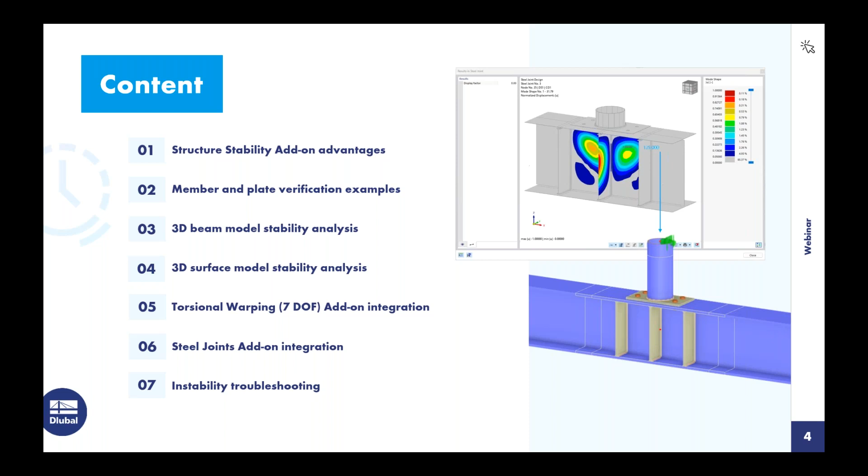So to begin, when looking at the structure stability, this is an optional add-on within the RFEM 6 program. This allows us to run an eigenvalue analysis to determine the critical load factors and eigenvectors, or in other words,

the buckling modes of our structure. Therefore, we can evaluate the stability of the structural system in regions prone to buckling.

So when we're talking about regions prone to buckling, we're typically referring to very slender beams or columns or thin-walled shell or plate elements.

Now, everything that we'll be carrying out today will be according to a linear eigenvalue analysis, which we'll talk a little bit more about in the next slide, but keep in mind that a nonlinear stability analysis is also available where we can actually increase the load increments to see the failure of the structure.

As already mentioned too, not only can we look at the buckling modes of the structure, but we can carry out instability troubleshooting to locate modeling errors with a load-independent eigenvalue analysis.

Now, of course, through all of these examples we'll see the graphical rendering of the stability modes, as we see over here on the right-hand side.

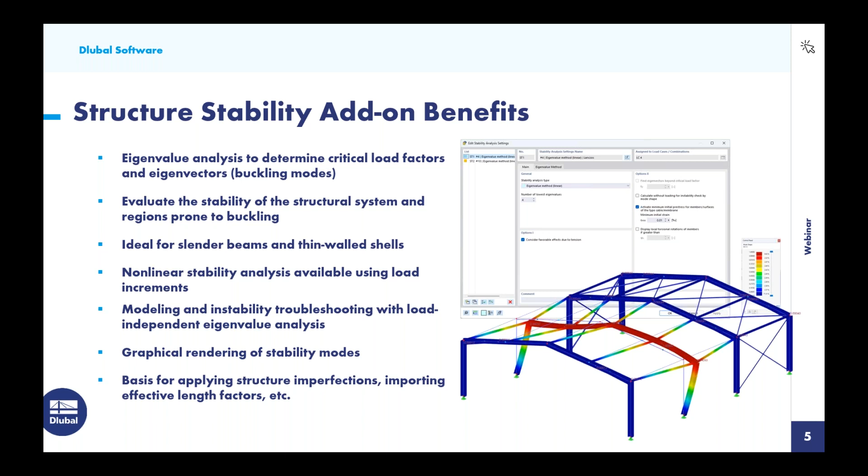Then we can integrate for further capabilities within the static analysis, such as applying structure imperfections. We can import effective length factors, and we'll see those carried out in the further design examples.

Now, when we do activate this add-on, we have 3 analysis types available to us. The first is the eigenvalue method, or a linear analysis.

And this is essentially where the buckling modes are determined through a linear method. If we have any nonlinearities defined, either material or geometric nonlinearities within the model, these are internally converted to linear elements in order to carry out the stability analysis with constant stiffnesses.

Now, alternatively, we do have the incremental method with an eigenvalue analysis. So this is nonlinear and will take into consideration all geometric and material nonlinearities.

Essentially, we will carry out the failure criteria and nonlinear effects, and these will be included during the incremental loading increase. We will find the last stable state with this nonlinear analysis to carry out the linear stability analysis, or the eigenvalues.

The third option here is the incremental method without the eigenvalue analysis, also nonlinear. This is identical to option number 2 with that nonlinear analysis capability, except we simply won't carry out the eigenvalue analysis within that last stable state.

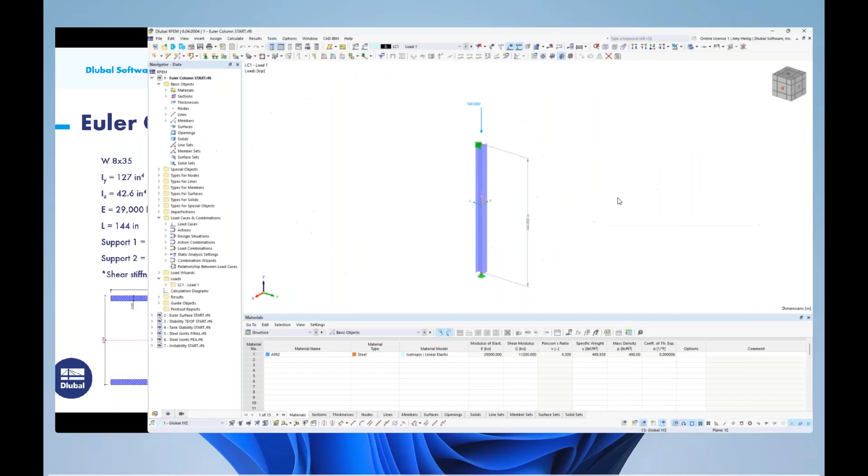Looking at this example within RFEM 6, our main base program, we see the W section profile with the 100 kip load applied at the top, the pin roller scenario, 12 feet high. We want to activate the structure stability add-on, which we can do in the toolbar by accessing base data, or by right-clicking the model name. Under the second tab are all of our available and optional add-ons, and for today we'll be utilizing the structure stability add-on.

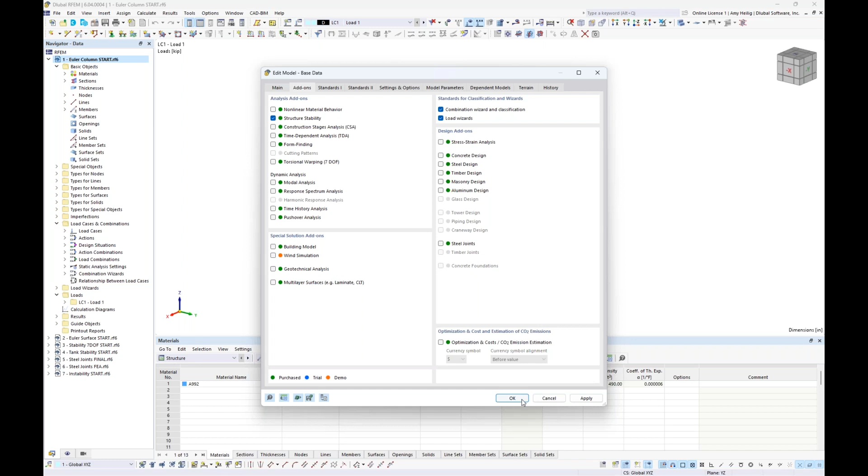When I click OK, pretty much nothing changes within the model itself, but we can go into the load cases and combinations dialog box. I currently have only one load case defined with that 100 kip load applied at the top of the column, and this will be carried out according to a first order static analysis.

We can activate the structure stability add-on with this checkbox at the bottom. Looking at the default definition types, there are two immediately set. The first is an eigenvalue method linear analysis, which we recognize from the PowerPoint, and we'll carry out that linear analysis today. We can set the number of eigenvalues to solve for; the default is 4, but we could increase or decrease this depending on our model. The second default setting is identical, just with a higher number of eigenvalues set to 10 by default. So, carrying out the linear analysis with 4 eigenvalues, we'll click OK.

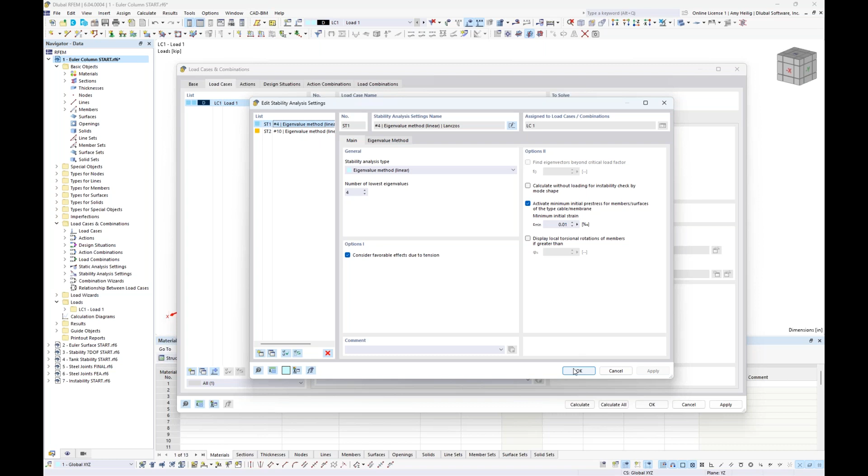To run this calculation, we initially calculate the static analysis with this first load case, but then we carry out the second calculation for the stability analysis. We're not so interested in the static analysis results, but immediately we jump to the stability analysis results now available to us in our navigator.

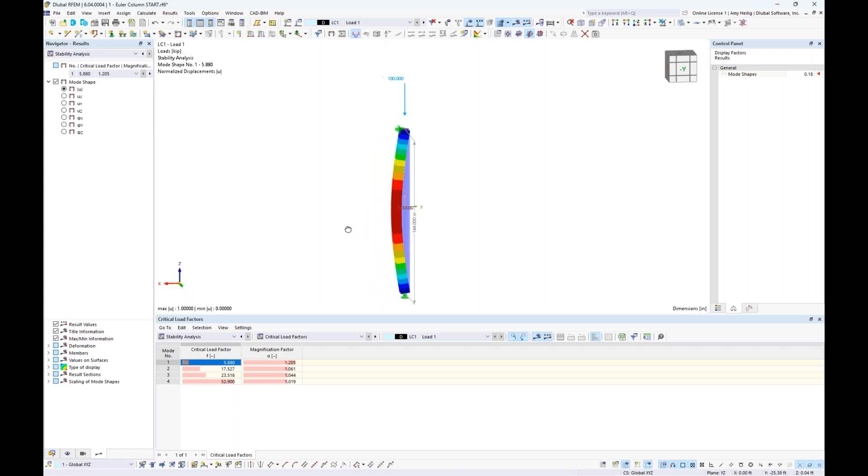Looking at the results for the structure stability add-on, we see 4 different eigenvalues we've solved for, and within the table we also see the critical load factor given. The critical load factor for this first buckling mode shape, which buckles out of plane in the weak axis direction, is the factor we multiply the applied loads by—in our case 100 kips—before the structure fails, as shown in this first buckling mode shape. The second mode shape buckles in the strong axis direction, and as expected we see a higher critical load factor of 17.527, which we again multiply by the 100 kip applied load to determine the critical buckling load.

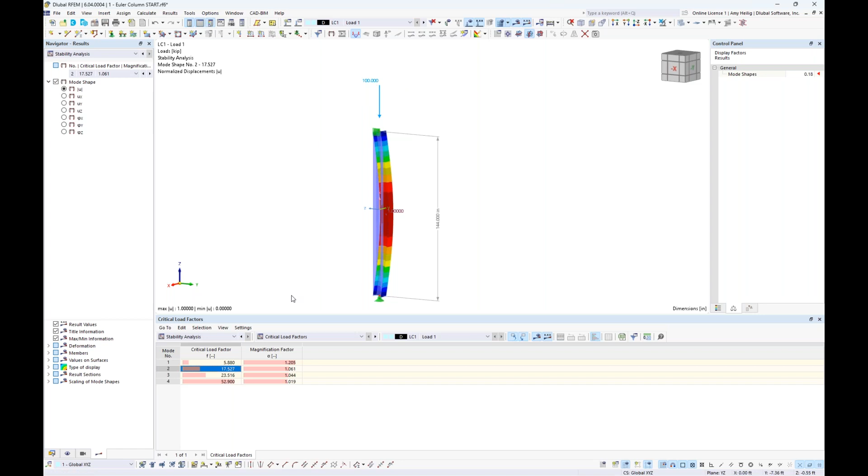So I think it's important to understand how we're carrying out this structural stability analysis for simple flexural design here, for the stability modes. Moving on to our second example, this is really very similar to what we just saw with our column, yet this time I wanted to utilize a 2D surface element.

So we go into RFEM here to open up this example. As mentioned, this is a two-dimensional surface, so we have 10 inches wide, 50 inches tall. I have left on the display here the FE mesh, so you can see how the structure will mesh this for this two-dimensional object. We also have a 1 kip per inch load applied at the top here.

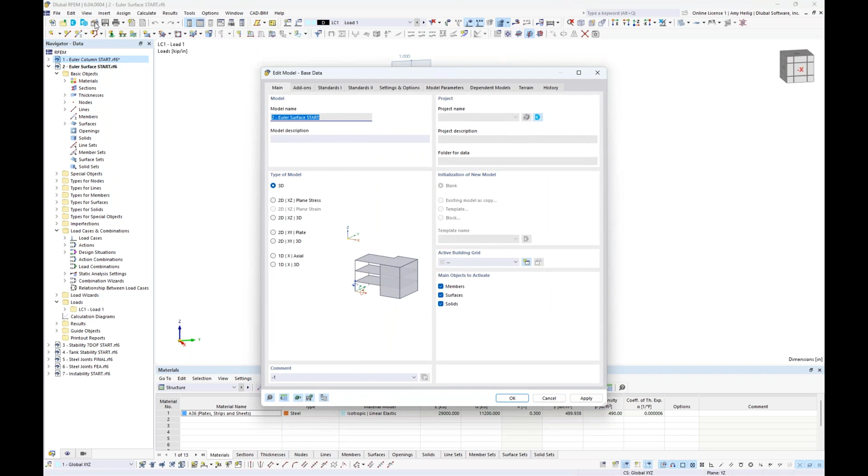So very similar to the column, we want to go into the base data, and we can do so within the toolbar directly to activate, under this second tab, once again, the structure stability add-on. We go into our load cases and combinations, and for this example we have our single load case here with the 1 kip per inch applied as a line load at the top of this 2D surface element.

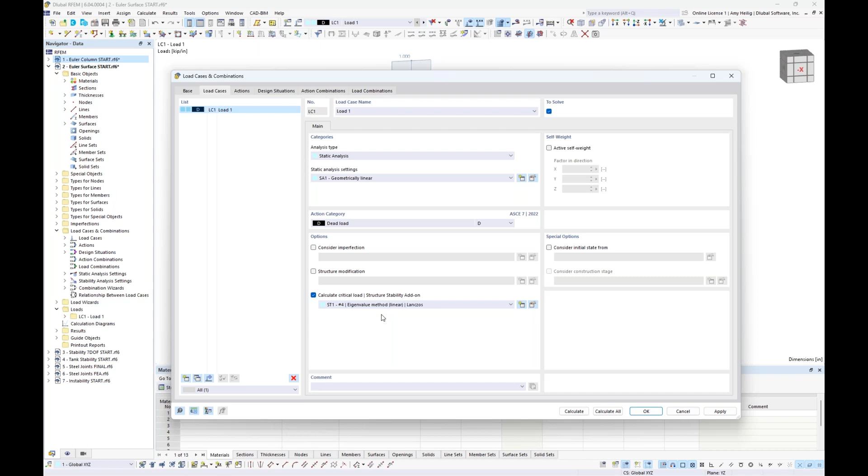We want to not only carry out the static analysis but also the structure stability analysis. We'll go ahead and leave these default settings here for a linear analysis, carrying out 4 eigenvalues, and we can run this calculation. The program would initially mesh the structure if we didn't already have it, carry out the static analysis, and then move on to the stability analysis.

Taking a look at our stability analysis results here within our dropdown, we see our 4 different mode shapes. The first mode shape you can see here is buckling out of plane for this 2D surface element, with a critical load factor of 9.566. Taking a look at these additional mode shapes, we can see the deflected shape, but the critical load factor here is much higher. In reality, we're most concerned with the lowest critical load factor.

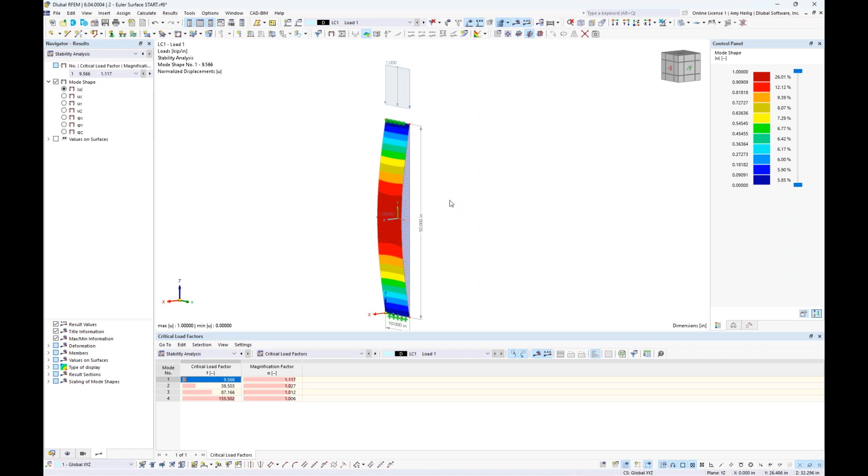Again, this is the factor, 9.566, that we can multiply by the applied load here of 1 kip per inch before we would expect to see structure failure, or the buckling out of plane. We take this information back to the PowerPoint to compare to the analytical formula, and we find a ratio of 0.997.

Okay, so that should give us a better understanding then of the basic behavior of this structure stability add-on for a simple beam and a simple surface.

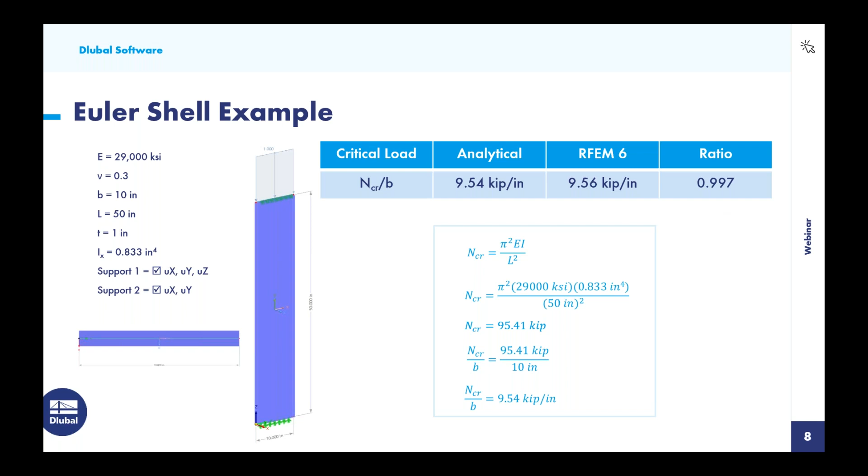Now let us go back into RFEM here to open up our third example. This one should be a little bit more interesting, where we have a 3D structure that is composed entirely of beam elements. So you can see that all of these are member elements for our columns, beams, and braces, represented by a single line element here. So no surfaces for this particular example.

If we want to do a quick overview, the cross sections are from the AISC database. So we have W10 by 49s. We have some square HSS sections spanning between these moment frames, single angles for our cross braces here for lateral bracing, and we also have a very small taper for this beam member, in particular at 25% of the member length before it frames into the vertical columns.

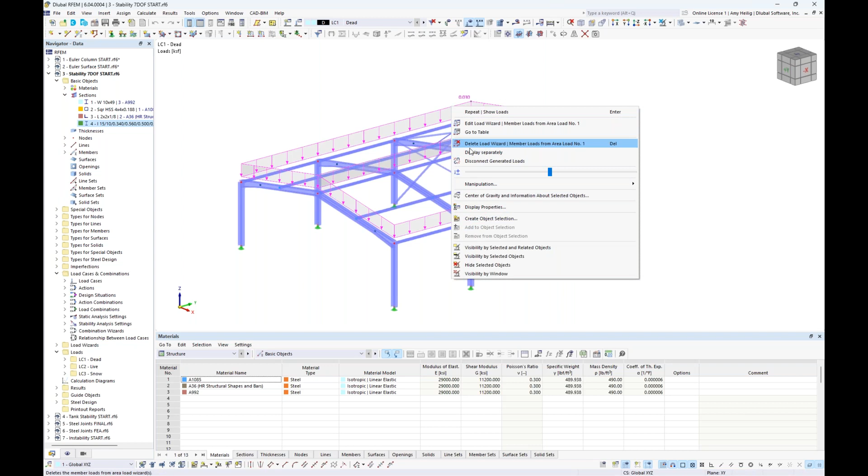Now to quickly take a look at the loading for this example, I have only 3 load cases defined. We can view these loads here, and these are just general area loads created with the load wizard for dead load. If we're curious to see how the load distribution looks, we can right-click to display separately, and notice that I have created a one-way area load distribution so that the loads are mainly on these main beams here rather than the HSS spanning in the global Y direction.

We can also view here the live load, same concept. If we want to view the area load instead, we can see this shown here on the structure with a varied magnitude.

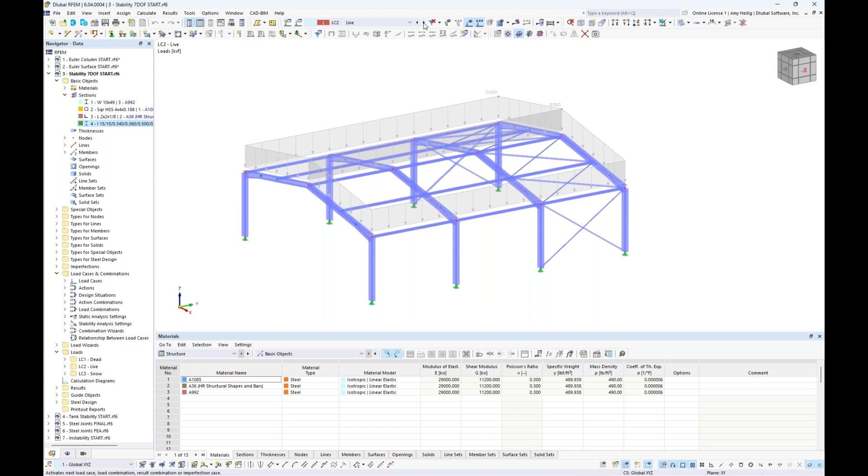And finally, we have a projected snow load in the vertical direction. For this example, I have applied only gravity loads. When evaluating the buckling behavior of our structure, we want to evaluate the worst case scenario with the highest compression forces in our members. In column elements, we want to see the highest forces acting downward, typically from gravity loads. If we included wind uplift forces, this would only help the buckling behavior further, since it introduces additional tension in those members. So when evaluating structure stability, we want to look at those downward compression, gravity-only load cases. I've combined these load cases into load combinations according to ASCE7.

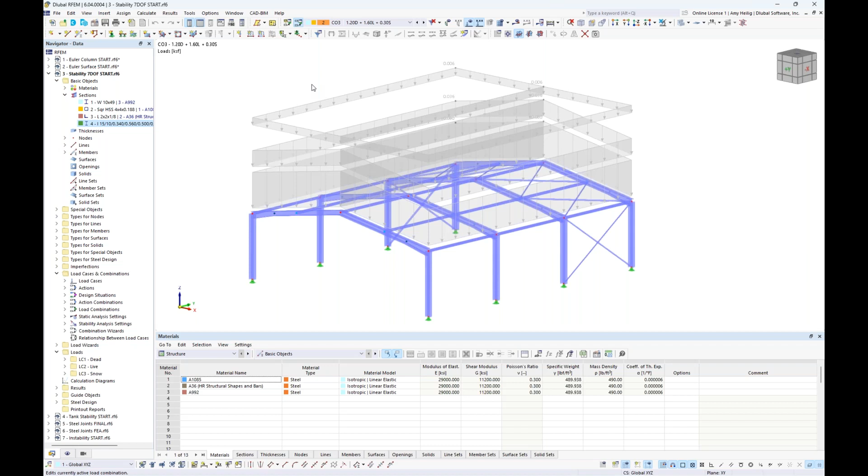We can see those load combinations displayed here graphically along with the relevant load factors. I'm going to go into my load cases and combinations. We could activate structure stability for each individual load case, as in our previous simple examples. But instead, I'm interested in carrying out the buckling analysis for my load combinations, where all the load cases are combined together.

The program by default creates two design situations based on ASCE7 2022 in this example. You can think of a design situation as simply grouping together all of our factored load combinations. We see this here: LRFD according to ASCE7, as well as our second design situation, which groups together all of our unfactored load combinations. This will eventually give us an envelope solution for those factored and unfactored load combinations together.

Under the combination wizard settings, everything is solved here for our load combinations according to a second order analysis, but we have the ability to activate the stability analysis directly within the design situation. These default settings are identical to what we saw previously within the load cases, where we can carry out the linear analysis, and perhaps increase this to 10 different eigenvalues to solve for this structure.

Now that I have activated it within the design situation itself, I take a look at the load combinations individually listed out, and I can see by default that the structure stability add-on is activated here, simply because I activated that checkbox under the design situation. We can also come in and individually carry out the structure stability for each load combination as well.

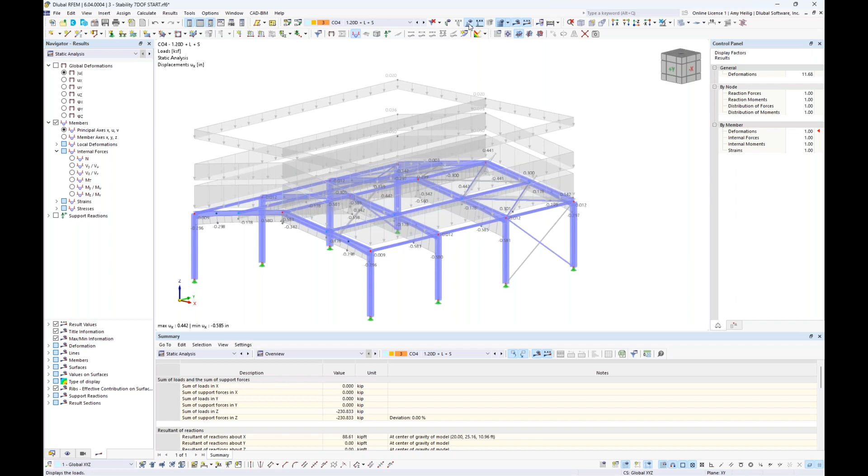When we toggle this dropdown to the design situation for our factored load combinations, this is nice because it's more or less an envelope solution for the static analysis. Within this table showing our static analysis results for this design situation, we also have the stability analysis envelope solution. The minimum critical load factor is 10.532, and the controlling load combination is load combination number 3.

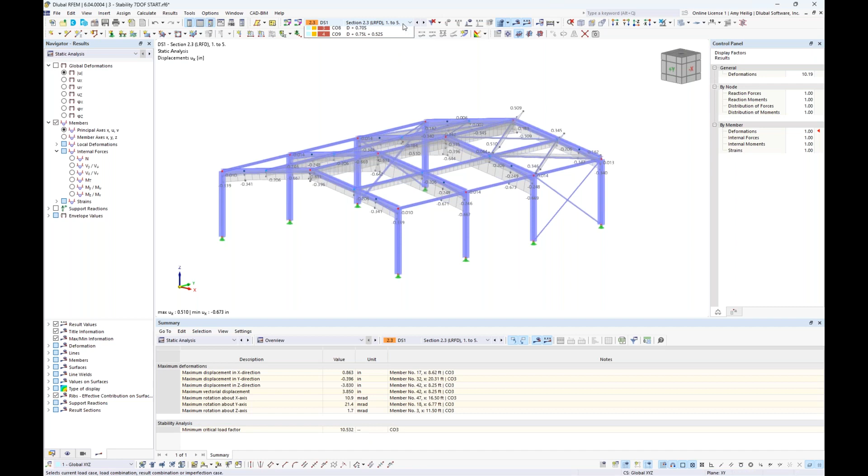It's nice that we don't need to run each individual stability analysis for each load combination and manually check the results, since the program gives us the controlling load combination here. We toggle down to display the loads for load combination number 3, and no surprise, this is the controlling case because we have all 3 loads activated with the highest load factors, giving us the greatest compression forces in our members.

We will toggle down to the stability analysis results for load combination number 3. As we had input into the program, we solved for 10 different mode shapes. Starting with mode shape number 1, we see a racking of this initial moment frame with a critical load factor of 10.532, as shown within the design situation itself. Essentially, we're seeing flexural buckling in the strong axis direction of these columns.

Looking at some of the additional mode shapes, we can see similar behavior just in different locations of the structure, with a higher critical load factor. As we continue to increase, we may start to see more localized mode shapes, meaning the individual buckling of these columns, particularly in the weak axis direction. Whereas compared to the mode shape before, that was more of a global mode shape that affects the structure together.

Okay, so now that we are looking at mode shape number 1, let us focus in on this particular column here, and this is member number 10. When we are looking at the stability analysis results within the table, we can use this drop down to view the results by member.

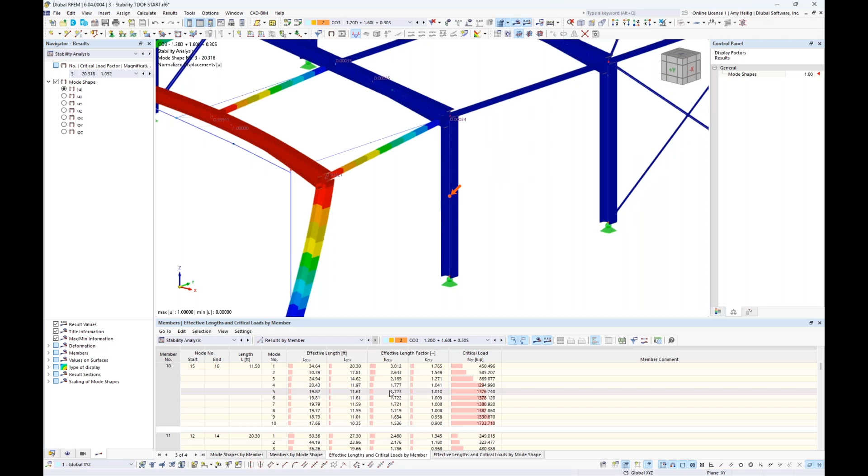Now, when I take a look at these additional mode shapes, they're really not affecting member number 10 until I get down to mode shape number 7. And here we see the failure in the weak axis direction for member number 10. We see the relevant effective length factor in the weak axis direction given as 1.008 and the effective length as 11.59.

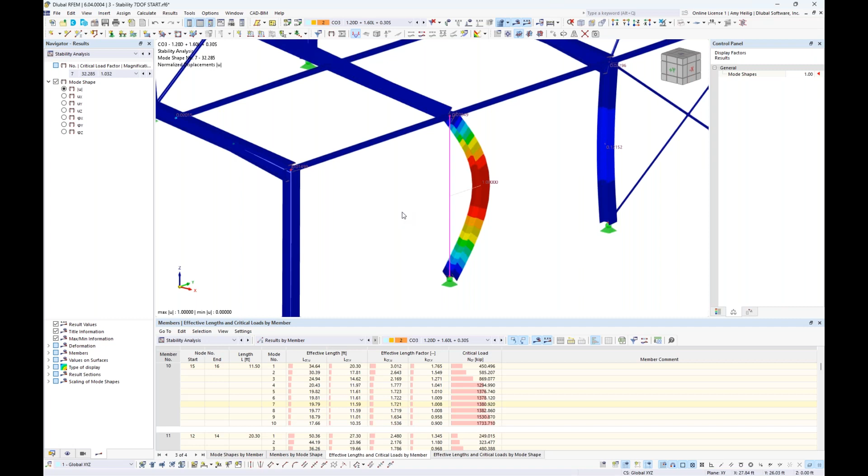So assuming that we have already activated the steel design add-on within RFEM to carry out the steel design according to the AISC, information such as the unbraced lengths or effective lengths are always needed in order to carry out that design. And we do so by inputting in the effective length for the member directly.

I want to show you a nice feature here that, assuming again that we're carrying out design according to the AISC with that steel design add-on, we input our first effective length definition where you have the ability to import in from the stability analysis.

So when I turn on this checkbox, I get a new tab here where for the strong axis direction, for consideration of, if we go back here to the main tab, flexural buckling about the major axes, we can import in that effective length factor directly from the stability analysis.

So we choose here a load combination number 3. We will choose the mode shape number 1, and we can either graphically select member number 10 or we can choose it here within our dropdown, and notice that that effective length factor is automatically brought in as 3.01.

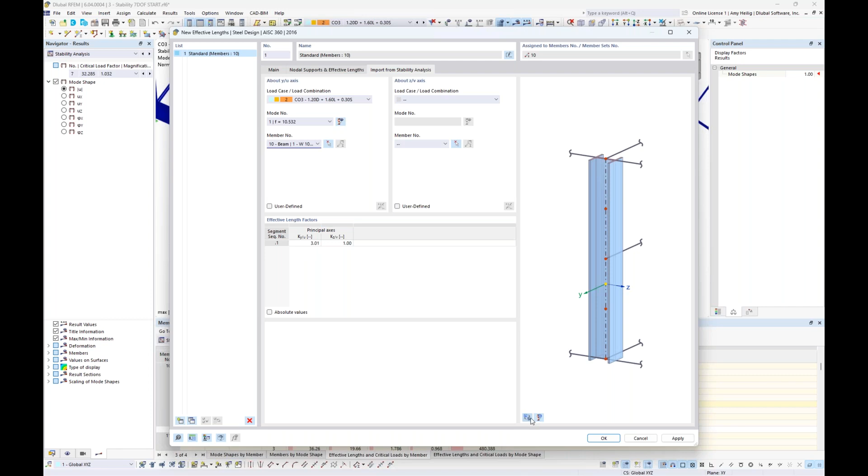We can do the exact same thing for the weak axis direction. Again, this is specific for member number 10. We will choose load combination number 3, but this time we want to choose mode number 7. Remember, that was where we saw this column fail in the weak axis buckling direction, again for member number 10.

And we see that effective length factor brought in automatically as 1.01. So we don't need to do anything further here in terms of the effective length definition for flexural buckling in the strong and weak axis direction if we integrate this with the structure stability add-on.

Okay, so now that we have covered the basic stability mode shapes here, keep in mind that everything that we have seen so far has been based on 6 degrees of freedom. And with 6 degrees of freedom in these various mode shapes, we notice that we're really only able to consider flexural buckling.

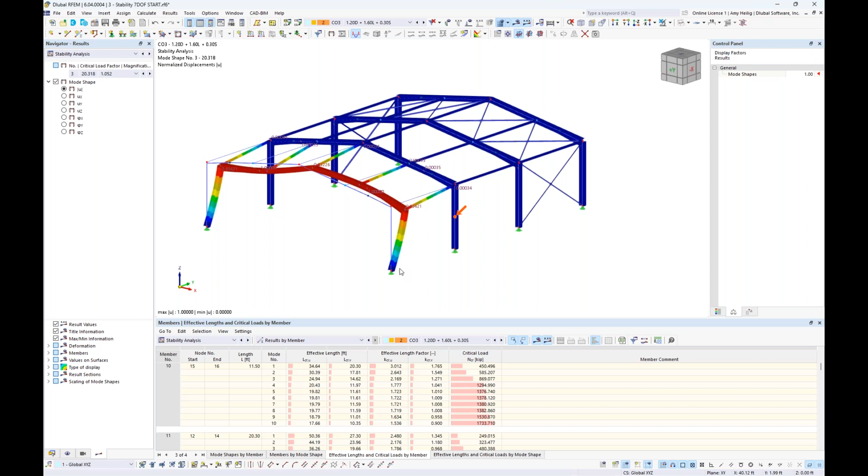We certainly can see this with the mode shapes directly with flexural buckling failure of the columns themselves. But if we back up a step to look at the static analysis results or the internal forces from load combination number 3, what we'll actually see here is that we have pretty high bending forces along the length of our members. And when we look at our columns, we have pretty high axial forces, of course. And when we're talking about these bending forces, for example, for these beams, this should immediately flag us that possibly lateral torsional buckling is an additional stability failure state that we need to consider.

So let us go back to the PowerPoint here to discuss these different stability failure modes. Now, we should be very familiar with the flexural buckling by now for our members. Ultimately, there's some critical buckling load for the strong axis and the weak axis before we see this member fail with flexural buckling.

But there are also additional failure modes such as torsional buckling that has some other critical buckling load factor before we would see this member twist about its longitudinal axes. This might be quite common for something like a cruciform section.

Then we also have flexural torsional buckling. When we have an applied axial force to the member on something like a single angle that's unsymmetric, we're not only going to see this flexural buckling, but it's also going to be twisting about its axes.

And of course, lateral torsional buckling is also a consideration when we have a bending moment along the length. So something like singly symmetric sections or unsymmetric sections, we're not only going to see it move out of plane, but also twist about its own axes. And the problem is that 6 degrees of freedom can only consider flexural buckling.

Now, we can go ahead and say, well, if we are designing according to AISC or CSA, of course the codes have analytical equations that are going to design for these additional stability failure modes. But this is in the design process. What I'm talking about specifically is with the static analysis as well as the structural stability.

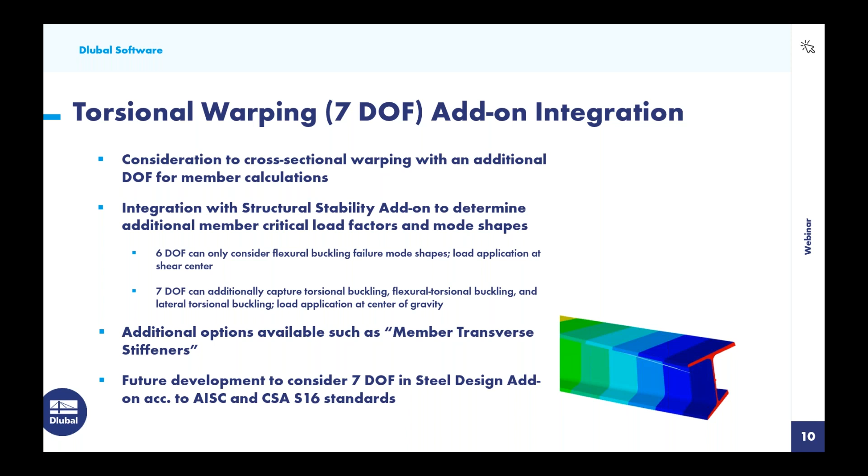Okay, so what we will do here is go back to the RFEM model, and we want to go into the base data here. Under the second tab, we will activate now not only the structural stability, but the torsional warping 7 degrees of freedom. When I do this, the program says it needs to delete the results, of course, because that was all based on 6 degrees of freedom.

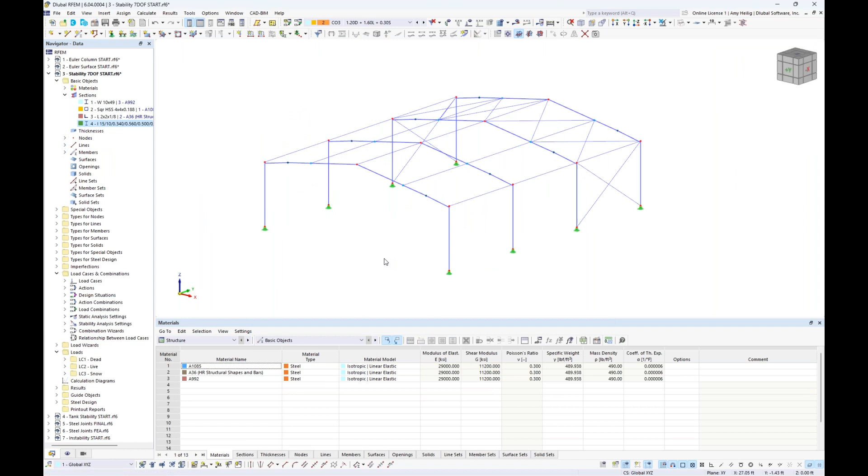Now, by default, all of our members are considered free to warp. There is no warping restraint along the member length. In addition, if you would like the warping internal forces to be transferred to adjacent members, it's important here to create what we call a member set.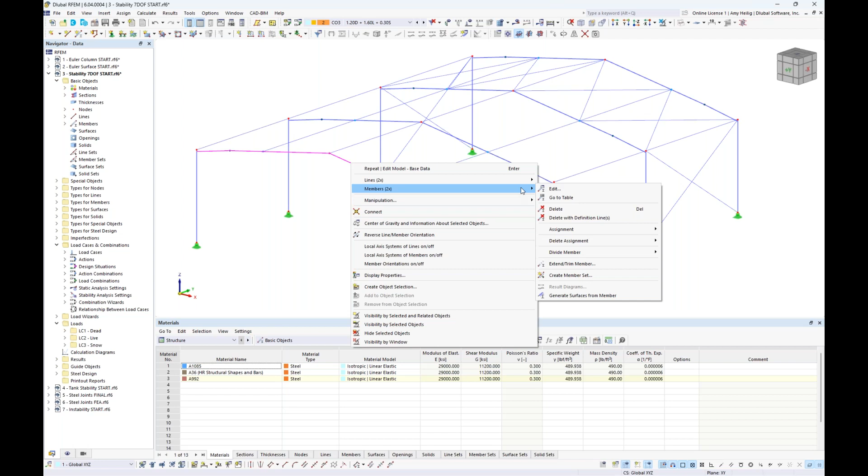So what I mean by this is that if we want the warping forces with the 7th degree of freedom to be transferred from, let's say, our beam on the right over to our beam on the left, we would need to hold down our control key to make sure both are highlighted here. We right click, and under the member option, we have the ability to create a member set.

So that's just simply grouping those members together so that those warping internal forces will be carried out to adjacent members. Now, circling back to the warping restraints, we should see now under types for members, we have a few additional options here, including member transverse stiffeners. So I'd like to double click on this to create a few stiffener types for these members in order to restrain the warping at the member start and at the member end. And within this dropdown, we actually have several different stiffener types.

For example, we can choose a flat plate where we could input the material and the dimensions, and the program will automatically calculate the warping spring to be considered within the analysis.

For today, we will use this option at the bottom called warping restraint, where we use the full warping restraint and apply this to the member based on a certain percentage of the length. So I'm going to activate this warping restraint at 0% of the member length, or the member start.

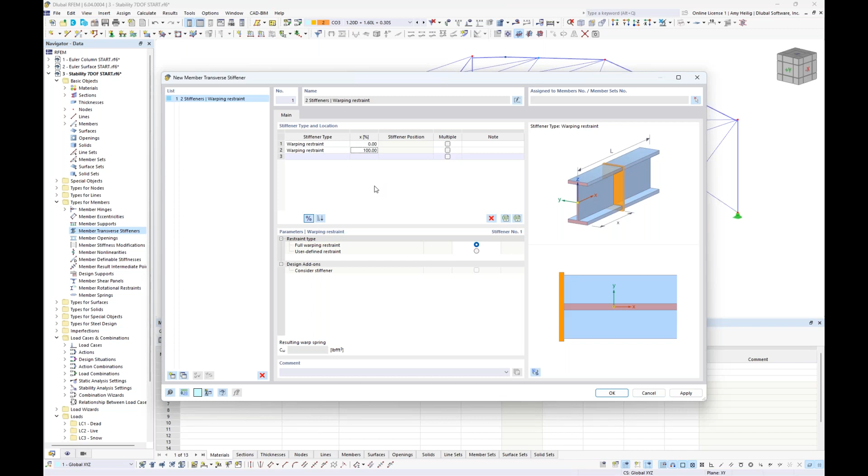And I'm going to add in a second warping restraint at the member end, so 100% of the member length. Then we can graphically select which members we would like to apply this warping restraint to. I'll use my selection box to select all of those main beams, click OK, and you'll notice we get a nice symbol representing where that warping restraint is located at the member start and end.

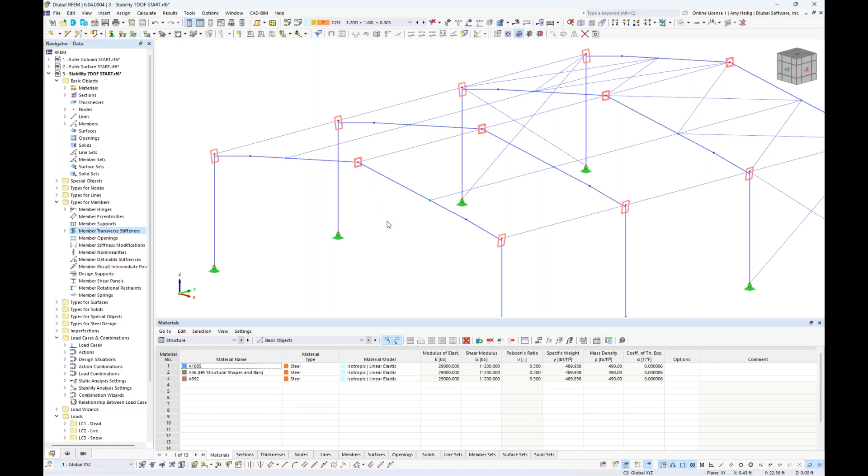So now we want to go to calculate all, and we have to rerun the static analysis with 7 degrees of freedom. We see the load cases carried out, but also the load combinations according to a second order analysis. Then we run through the structure stability again for all load combinations, and we should see slightly different results.

Taking a look at the static analysis results, where we can view the internal forces of our members, you'll notice we have a few additional options now with that 7th degree of freedom. For example, we can view the warping moment along the member length, or the primary torsional moment and the secondary torsional moment. This previously was not available with 6 degrees of freedom.

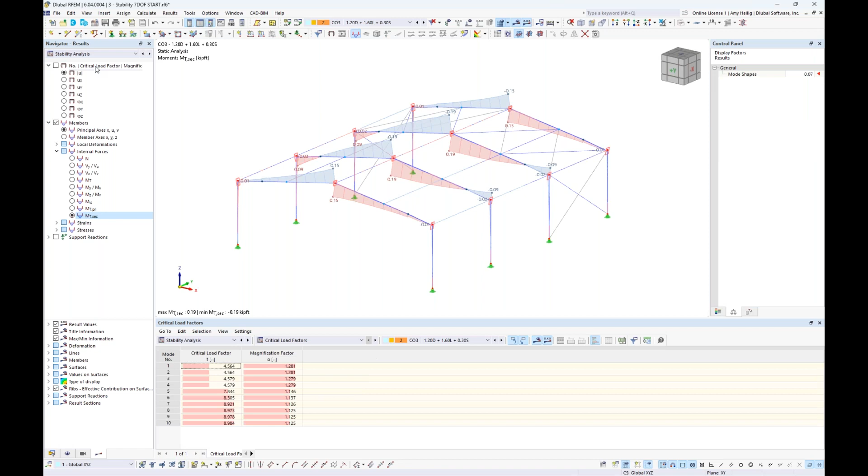Toggling down to our stability analysis, we should see pretty significant or different results here as well. No longer do our 10 different mode shapes look like what we previously saw with 6 degrees of freedom. We see here the critical load factor is now 4.564, and our relevant mode shape is really focused on these columns.

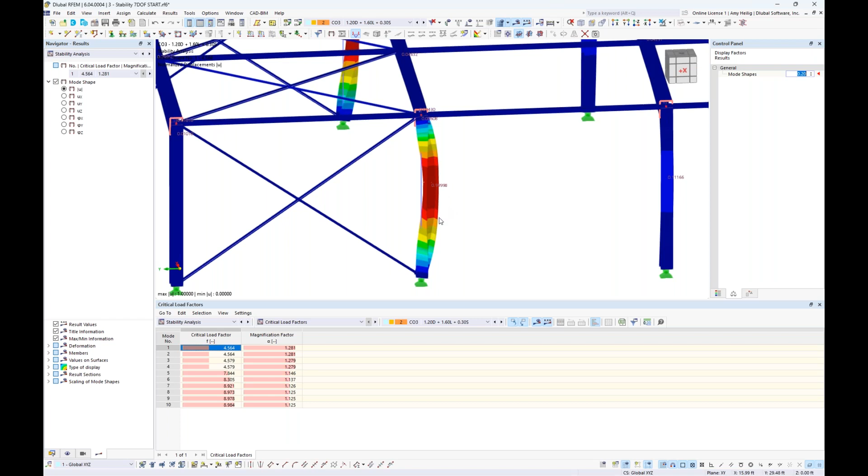We can increase the size of this mode shape ever so slightly to see how this column essentially has flexural torsional buckling, where it is both bending out of plane but also twisting about its own axis. So you can see the critical load factor has significantly decreased.

Previously it was around 10.5, and now it's only 4.564. Let's look at the relevant mode shapes. When we look at these first four mode shapes, it's really flexural torsional buckling of these columns, but then we get into mode shape 5 with a critical load factor of 7.84, and this is where we begin to see lateral torsional buckling of those beam elements themselves.

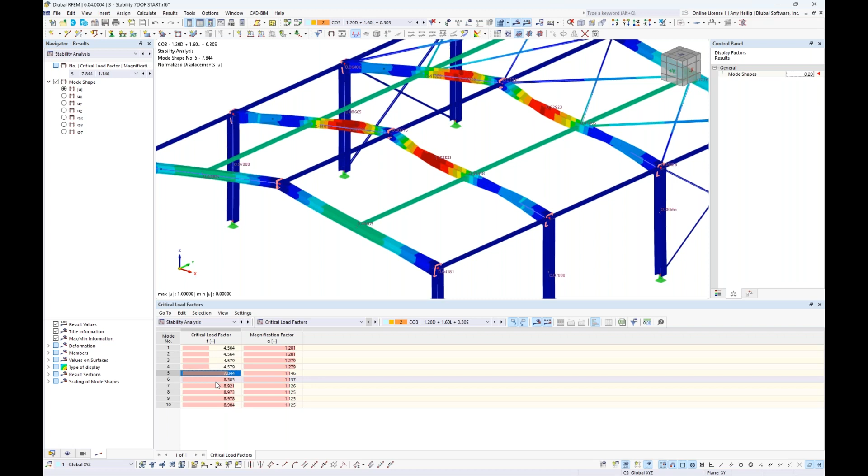So again, when we are carrying out 6 degrees of freedom, if we're only concerned with flexural buckling, no problem, the program automatically considers this. But if flexural torsional buckling, lateral torsional, and torsional buckling are also a concern, then we really would want to consider enabling this 7th degree of freedom.

All right, so this should give us a pretty broad overview of member stability design. I now want to move into our next example to talk about surfaces. You'll see here that I have a tank model, and everything is composed of 2D surface elements. The tank wall is a surface element, as we see here, as well as the tank roof.

To talk a little bit about the thicknesses and materials, the entire tank wall and roof are going to be comprised of half inch thick A36 steel material. And then at the bottom here, we have an 8-inch concrete slab, 4,000 PSI concrete.

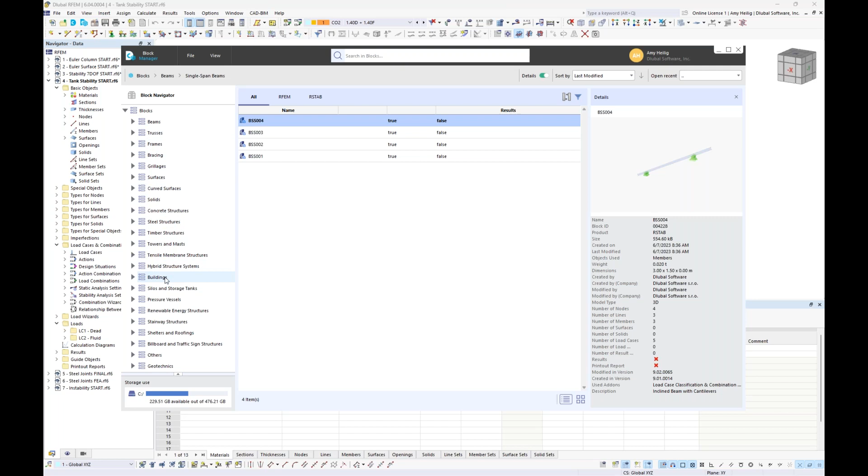I did want to point out that this structure was entirely created using our block options up here in the toolbar. When you take a look at the various block options, you'll see all the different categories for the different structure types, including silos and storage tanks. Within these options, as I cycle through them, you'll see all the various options where if I double click, I have the ability to define the dimensions, the material, and even some loading capabilities are automatically created. That is how this example was created automatically.

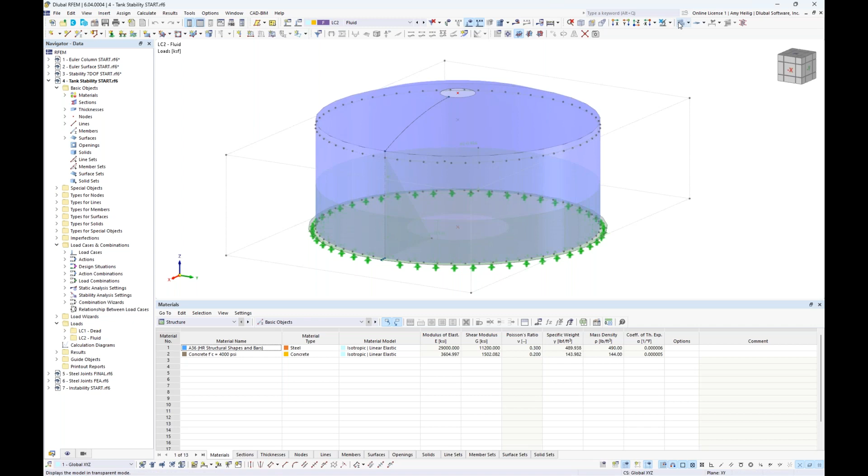For this example, we have only 2 load cases. We have a simple dead load where only self-weight is active, so no additional loads apply to this tank structure. Then we have the fluid load, which was automatically created with the block import option to represent fluid inside the structure acting with an outward pressure against the tank walls, and a downward pressure at the base for the concrete slab.

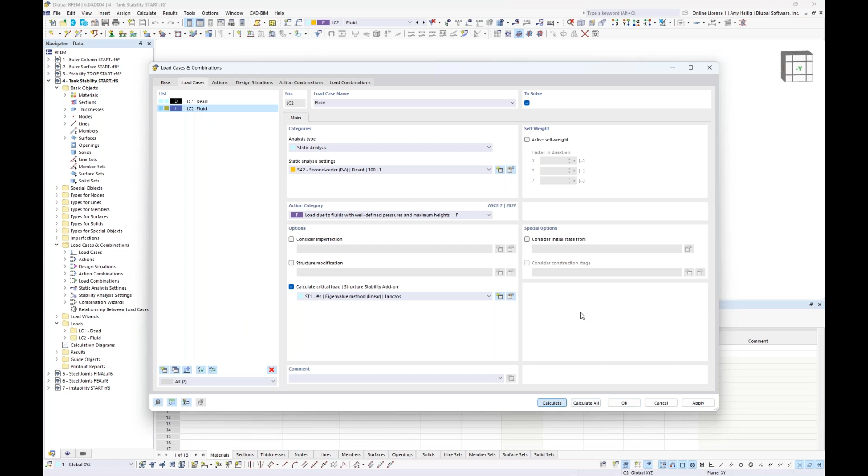I've left this with only these 2 simple load cases because for load case number 2, the fluid load, we get significantly high compression forces in our tank wall to carry out the buckling analysis. So I want to go into the load cases and combinations dialog box and carry out the structure stability analysis. A linear analysis with 4 different eigenvalues is fine for this load case. When I calculate this, the program will generate the FE mesh for our tank, run through the static analysis, and then run through the structure stability analysis for those 4 eigenvalues.

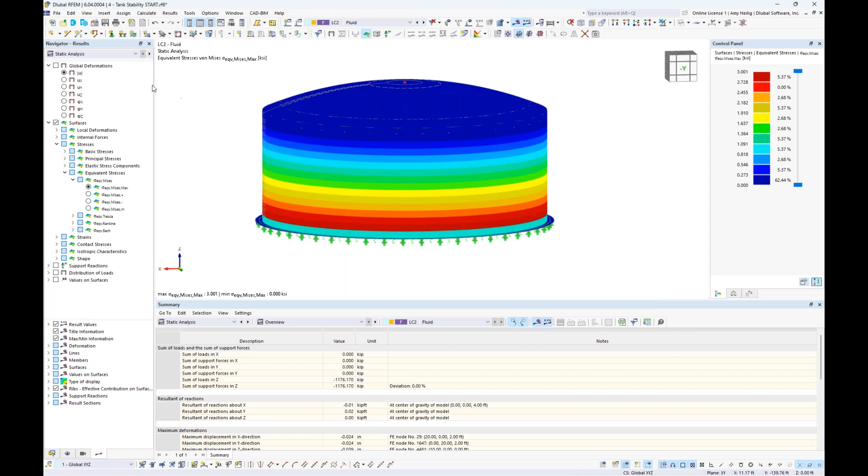Once this is done, we will see under the stability analysis the relevant buckling shape. I'm going to create a user-defined visibility for only the tank walls so we can see this more clearly. We have 4 different mode shapes that we've solved for. Notice the critical load factor is quite low here at 2.882, and we see the relevant buckling mode shape - kind of localized buckling modes all around the circumference of our tank walls. When I look at the additional mode shapes, the critical load factor is almost identical, around 2.8 or 2.9. Just notice that the location of these buckling modes has changed ever so slightly.

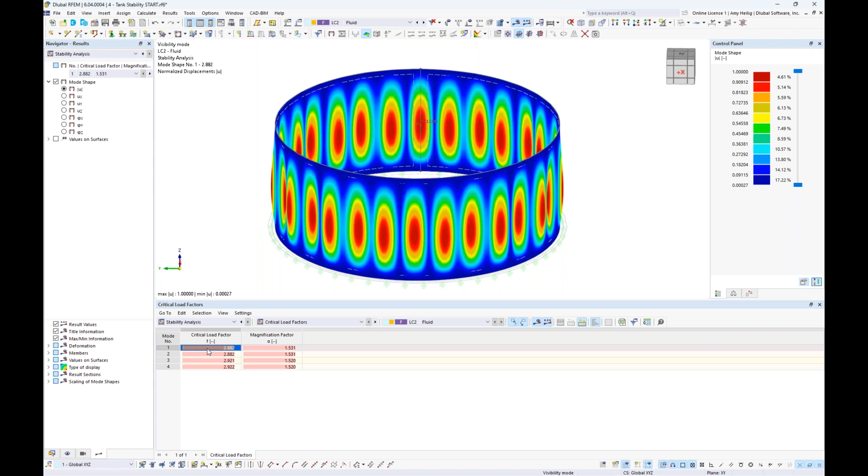So when we back up a step to look at the structure in general, everything that we model in an FEA software is considered perfect. What I mean is that everything we've modeled assumes the manufacturing process is perfect, that when we install this structure in the field it is perfectly aligned - but we know in reality that's never the case, that there's usually some type of imperfection in the manufacturing and/or installation of these structures. When we refer to the various codes, there are ways to consider these imperfections, and one of them is to directly model the imperfection in our FEA model.

I'd like to show you now how we can directly model these imperfections, integrating it with the structure stability and that first buckling mode shape. Going back to the navigator within RFEM, you'll see an option within the folder called imperfections. It should be known that imperfections is one of the available options in the base program - you don't need any additional add-on for this. What we can do here is create a new imperfection case, and under the imperfection type, we can choose buckling mode.

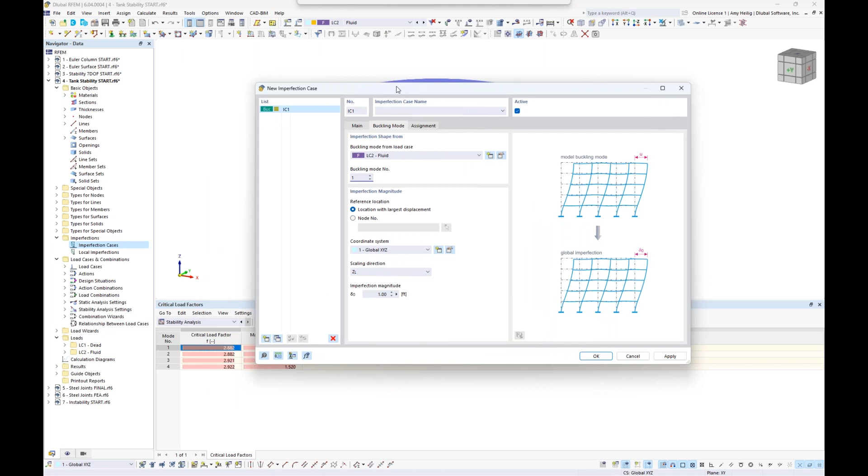What we can do is either select a load case or a load combination. If you remember, we carried out the stability analysis for load case number 2, the fluid load, so we can choose the relevant mode number 1. We can deform the mesh by scaling that mode shape, and we see here the imperfection magnitude options down at the bottom where I can import that buckling mode and scale it based on the X, Y, or Z directions.

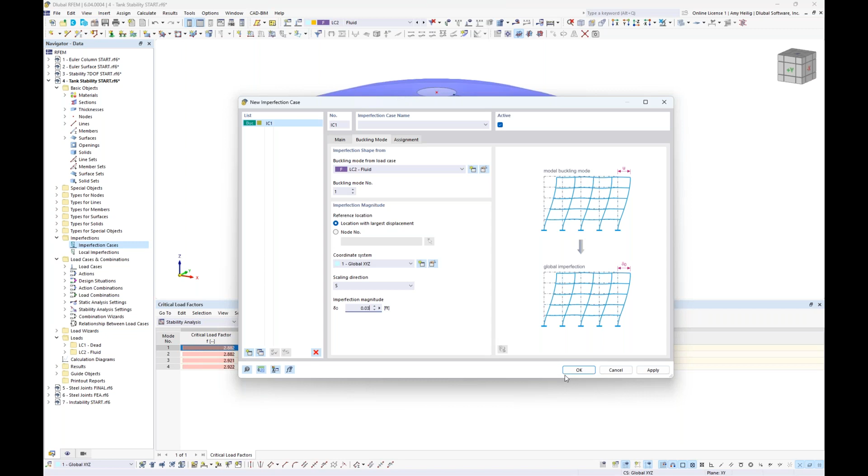Now for our case, we have a round structure that's not necessarily in these global X, Y, and Z directions, so we also have the spatial option where I can tell the program to scale that buckling mode shape a specific value that I input here. So we put in something quite small, like 0.03 feet. What I'm trying to replicate here is a manufacturing defect where we know that this tank wall isn't going to be perfect. So I'm going to deform the FE mesh before applying any additional loads to carry out the static analysis.

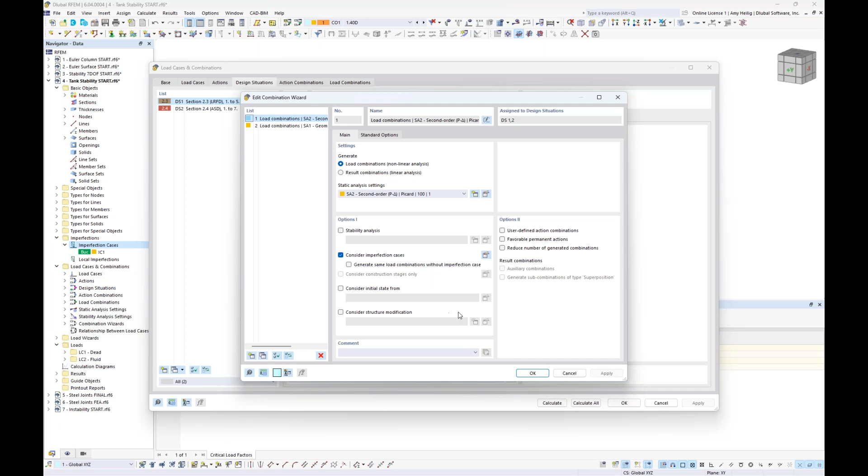Now that we've created this imperfection case, we're going to go back to our load cases and combinations dialog box. Under the design situations, we go back in to edit the definition type - remember we're carrying out a second order analysis, and we previously activated the stability analysis. Here you'll see an additional checkbox option to consider the imperfection cases, and this is typically checked on by default. So now when we go to our load combinations listed out, we see this imperfection automatically considered. When we take a look at load combination number 2, we are going to first deform the mesh based on that buckling mode and the scaled magnitude that I had input.

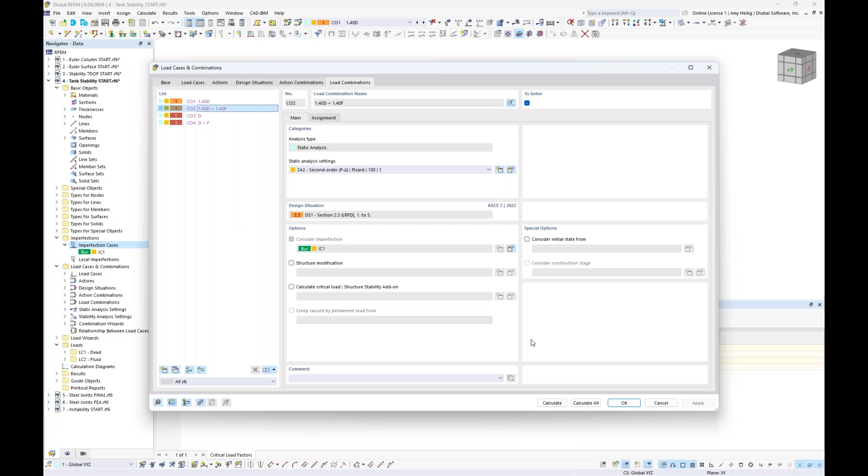Then we're going to apply the static loads, dead load, and fluid load to give us a full static analysis result. We can go to calculate all just to see what our results look like with this imperfection now considered. The program will carry out all of these load combinations with that imperfection considered according to a second order analysis.

Currently I am looking at load combination number 2, which is the dead load plus the fluid load. When I look at my deflected shape for the static analysis—not the stability analysis, but the actual static analysis—we see the deflected shape replicate those imperfections where we have directly modified that FE mesh.

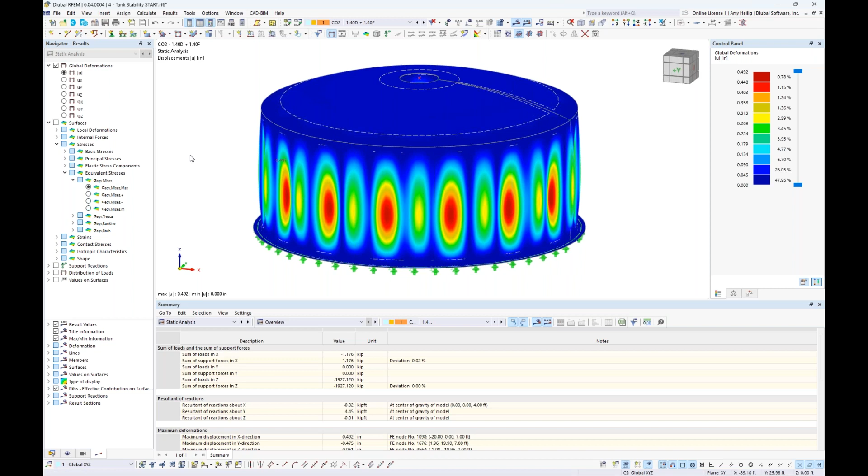In addition, we're probably also interested in the surface stresses, so we can activate here under our surfaces option, such as the von Mises stresses. Because of that deformed mesh, we're going to see slightly higher stresses at these particular locations where that deformed mesh is also applied.

So these imperfections can be really powerful in the sense of integrating with the structure stability add-on to outright model the imperfections, not only for surfaces, but we can also do so for members.

Okay, jumping to our second to last example here, I am going to focus in on a much smaller scale for the structure stability. Now I would like to turn to talk about steel connection design according to the AISC. You'll see here that I have a very simple model, carried out with one-dimensional members.

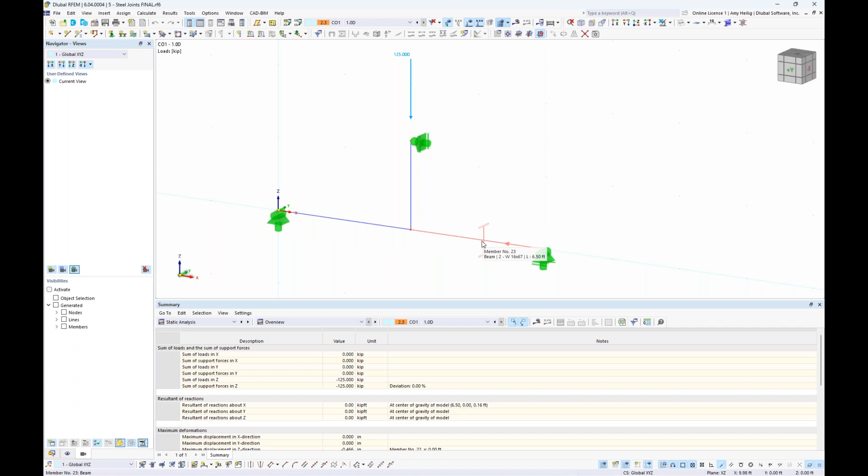If we turn this into wireframe view, and then go back to the rendered view, what we have here is a simple W cross section for our beam at the bottom. Then we have a vertical pipe member framing into this beam with a point load of 125 kips. I have activated our steel joints add-on.

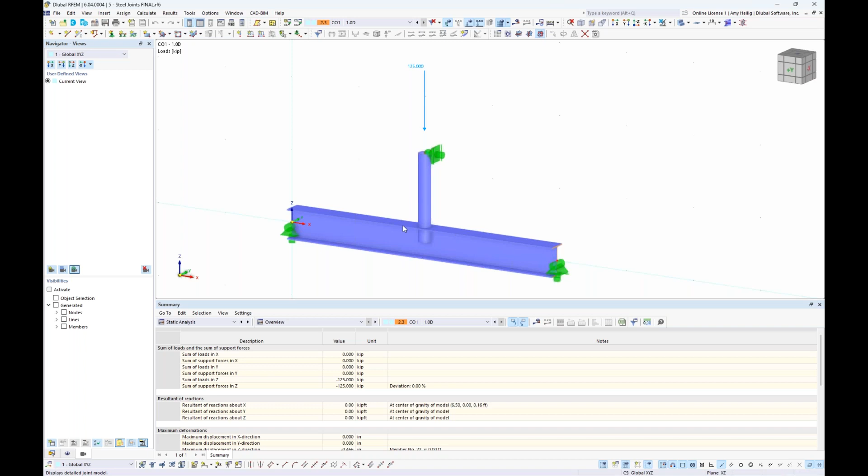This allows us to carry out the connection design according to the AISC. I've already input all of this information directly for this particular node where these members are intersecting, and we can graphically see some of those components here. I previously did another webinar devoted entirely to steel joint design, so I'd refer you to that on our website and YouTube channel, because we won't be able to cover everything in just a few minutes here.

But the powerful thing about our steel joints add-on is that it creates an FEA model underneath the hood, meaning any connection is possible. We are not just limited to standard connections carried out with analytical equations—this is a pretty non-conventional connection here, and that FEA model is created underneath the hood to carry out the AISC design.

What this also allows us to do, under types for steel joints, is have 3 different scenarios for this connection design. If we go into the steel joint directly, my first scenario is considering the connection with no stiffener plates. We just have an end plate here connected by bolts to the top of the beam flange, and our pipe member is welded directly to that end plate, but again no stiffener plates.

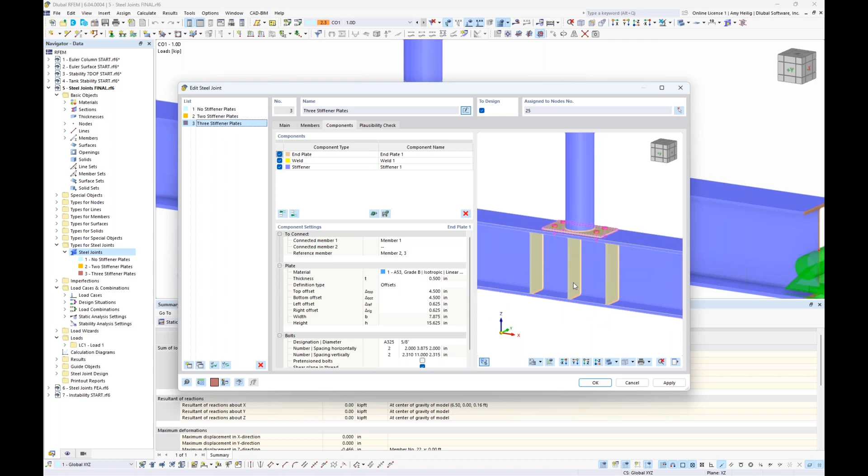Then I created a second scenario to compare, where we have applied 2 stiffener plates—you can see that additional component added at the left and right of that end plate. And then I created a third scenario where we have a third stiffener plate applied right at the center where that pipe is framing into the W section.

So when we carry out the design here, we'll go ahead and open up the saved results. Of course, we're going to give you full design of the bolts, the welds, and the plates according to AISC. But we also have the ability to integrate with the structure stability add-on to carry out the buckling analysis of this connection.

For these 3 different scenarios, I see my buckling analysis results, and you'll notice that the critical load factor for the first scenario, no stiffener plates, is given as 8.18. If we're further interested in seeing the buckling shape without any stiffener plates for this connection, we can activate this option in our toolbar to view the results in the steel joint.

So I can scale this mode shape slightly where we can see this FEA model that was generated underneath the hood, and the actual structure stability analysis was also carried out so that we see that buckling of the web is a concern for this particular connection.

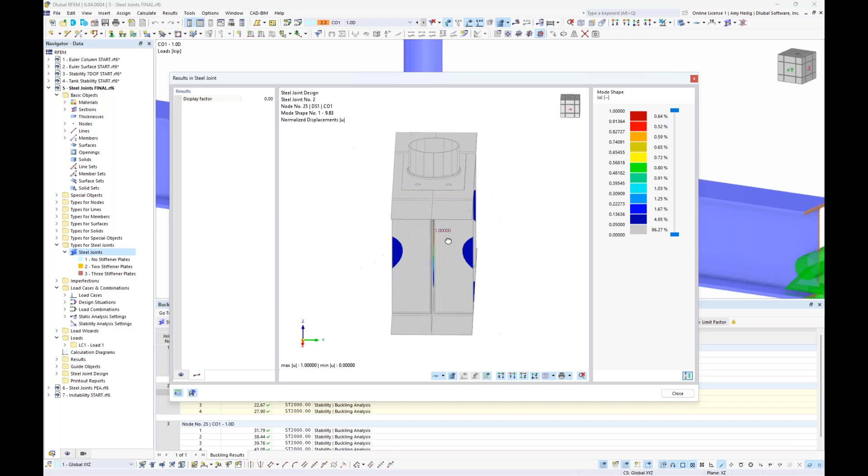Now moving on to the second scenario where we have 2 stiffener plates, we'll notice here that the critical load factor is slightly higher at 9.83. And we'll go ahead and take a look at the mode shape here, considering 2 stiffener plates. When we take a look at this deflected shape, again, there's still a concern of web buckling between these 2 stiffener plates at the left and the right.

And finally, we have our third scenario where we've added in this third stiffener plate, also shown here graphically. You'll notice that the critical load factor jumps immensely to 31.79. So again, we can multiply our loads by 31.79 before we need to be concerned with any type of buckling with this connection design. And what you'll notice with the deflected shape here is that the stiffener plate itself is actually going to buckle before the web element does.

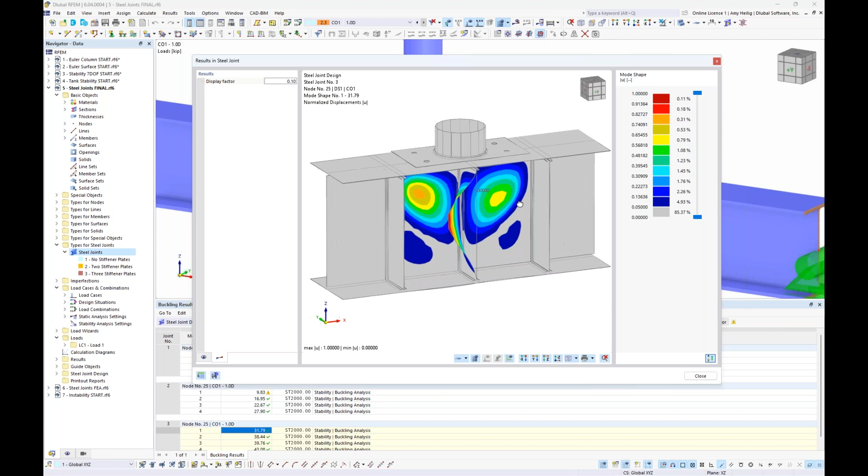So again, just these three different scenarios allow us to see the buckling behavior integrated with that structure stability add-on. So when you own both the steel joints add-on and the structure stability add-on, you by default have all of these results available to you.

You also have the option in the lower left-hand corner to save the steel joint model. And what this means is that the program's creating this 3D FEA model underneath the hood. So I went ahead and saved that just to show you what's going on in the background. The bolts, the welds, all of the plate elements are created automatically by the program with this FEA model that you see here, in order to carry out the connection design.

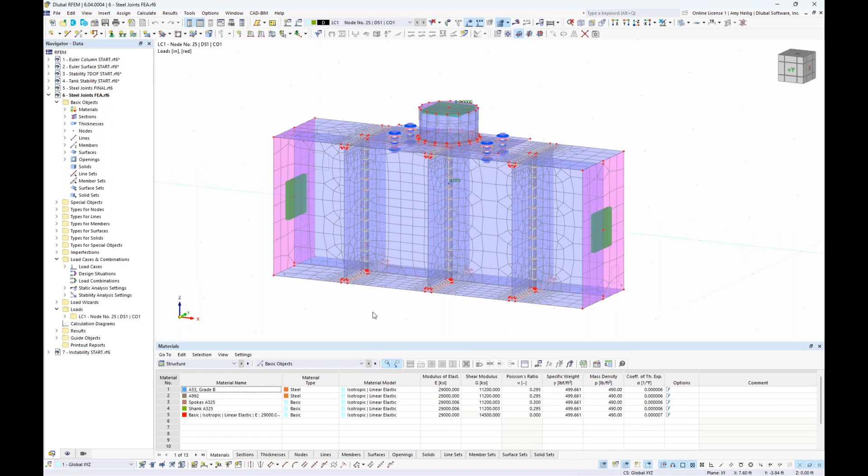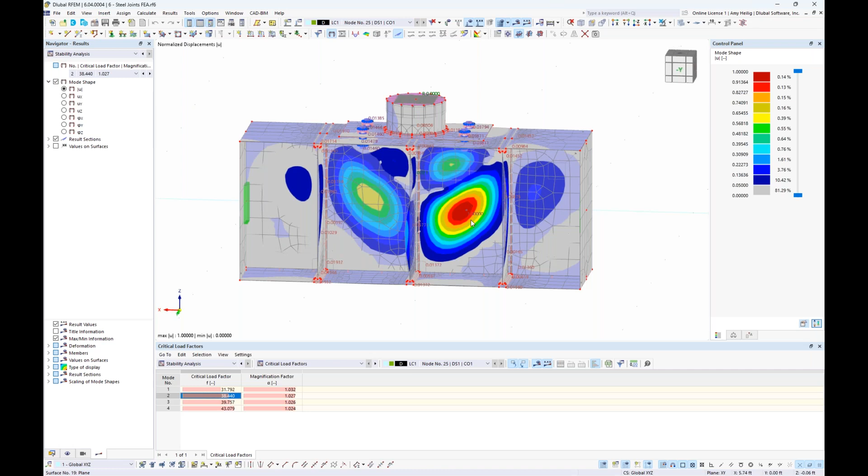And in addition to AISC design, we're carrying out the stability analysis. So every example that we've seen up until now is the same workflow going on underneath the hood, where we can view under the stability analysis results 4 different eigenmodes, the critical load factor of 31.792 before we see the buckling of that stiffener plate, and then also the relevant mode shapes here with slightly higher critical load factors. So again, we start to see concern for the buckling of these web elements. Pretty unique and powerful, about what's going on underneath the hood for any connection type because of the ability to generate this FEA.

All right, so the final thing that we want to go over here is instabilities. So we'll jump to our last example. And no longer are we going to focus in on the structure stability or the mode shapes of our structure, but let us turn to the topic of instabilities.

Instabilities are not unique to RFEM. They happen in any FEA program. The question is, do you have the necessary tools to help you investigate where these instabilities are coming from? The structure stability add-on can be incredibly helpful with this topic.

So we have here just a general steel structure, modeled with all beam elements, and these come directly from the CSA standard this time, with W250 by 80 steel shapes, some HSS members, and so on. I also have some various applied loads. We'll see the dead load applied here is an area load. We have snow load, and then we also have a couple wind loads in the global X direction and the global Y direction. And all of these are combined into load combinations here according to the NBC standard.

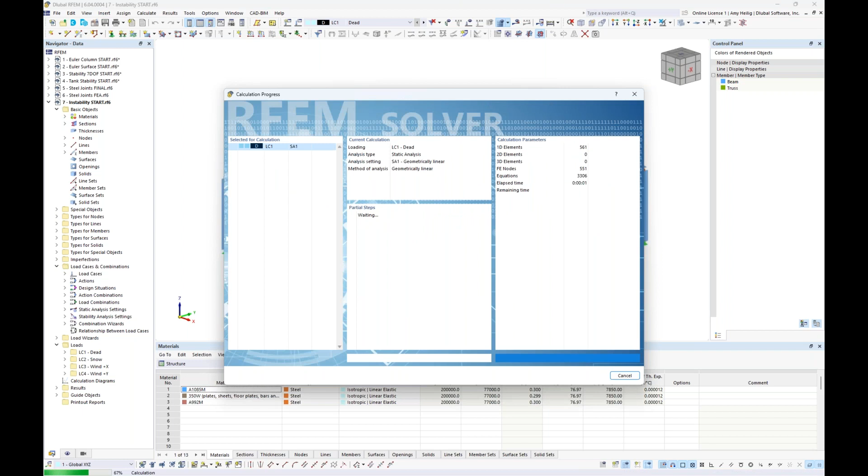And what we find with this first order analysis is our first instability. So we get a warning message in the program. And when we take a look at the table results down here, it tells us the stiffness matrix is singular. The structure is unstable in the direction of the global y-axis. Now, this red arrow here can certainly be helpful in a lot of cases where we maybe have a modeling error. If it's something a little bit more of a global instability, this red arrow is really just pointing to a single FE mesh point anywhere on the structure, so it may not be as helpful in those cases.

If we have ruled out any modeling errors and we're really unsure why we're getting this instability, what we want to do here is go back to our load cases and combinations dialog box, just like what we've previously done to activate the structure stability add-on.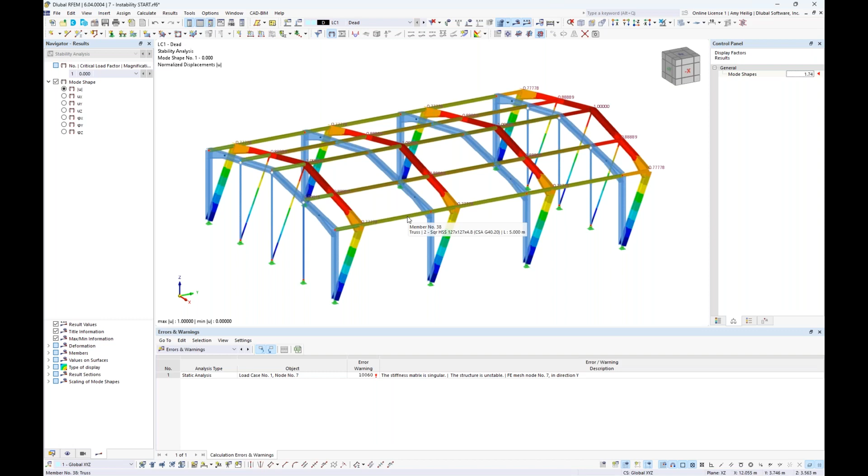But we will also see the load independent eigenvalue analysis run, and we will begin to see what the problem is here with our structure. If I increase this mode shape deflection, we see that the structure is just free to hinge about its own axes in the global Y axis, and that's simply because we have pin supports everywhere. These member ends are connected with pin moment ends, so we have no lateral bracing for this steel structure.

In order to resolve that, let us create a few members. I'm going to draw a new single member. The member type will be tension only for this lateral bracing, and the cross section will be a single angle I've already defined in the model. I'm going to turn this into wireframe view where I can snap to this particular node, and the program asks me to clear my results, no problem. The program automatically detects these snap points to allow us to create this cross bracing for this last bay shown on the right.

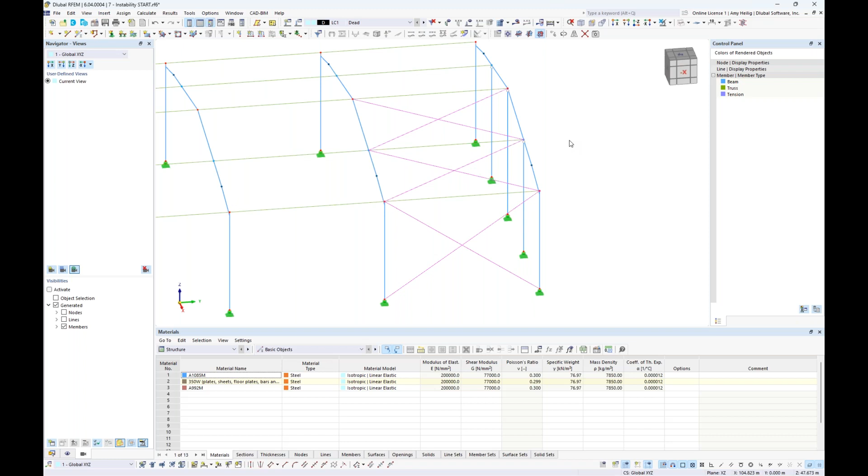Now that we have modeled this lateral bracing on the right-hand side of the structure, I can hold down my control key to select all of the elements. I can mirror this to create a copy about the YZ plane, selecting my mirroring point at the top of the structure. Now we should see this lateral bracing applied at the left side of the structure in that last bay.

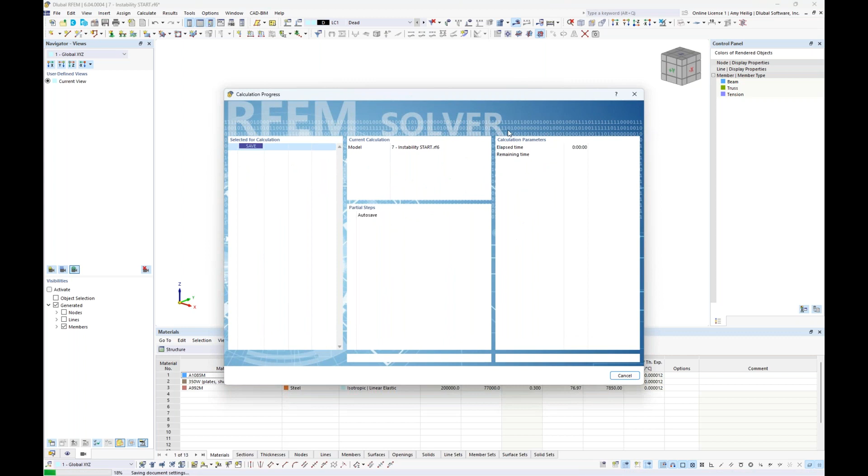So we would hope that we can go into our load case 1 to rerun this calculation. We'll cycle through the static analysis, and unfortunately what we'll find again is another instability. When we take a look at this new instability error, it tells us that the instability occurs here, where this red arrow is, around the global axis X. So again, we've kind of ruled out any modeling issues.

We're not sure what's going on, but I've left that structure stability add-on active for load case number 1, so I can simply turn on my results here, and sure enough I see what the issue is. It appears this column is not connected to the rest of the structure. In this scenario, this red arrow is certainly helpful for identifying where that modeling error occurs. When I turn off the results and zoom in wireframe view very closely, sure enough I see that these two nodes are not connected.

So I can simply take this node and drag and drop it here to this other node connected to the frame. What we should see now is hopefully the dead load will solve and we have no more instabilities for this load case. So assuming now that everything is solving for first order analysis for these first few load cases, we want to drop down to a load combination.

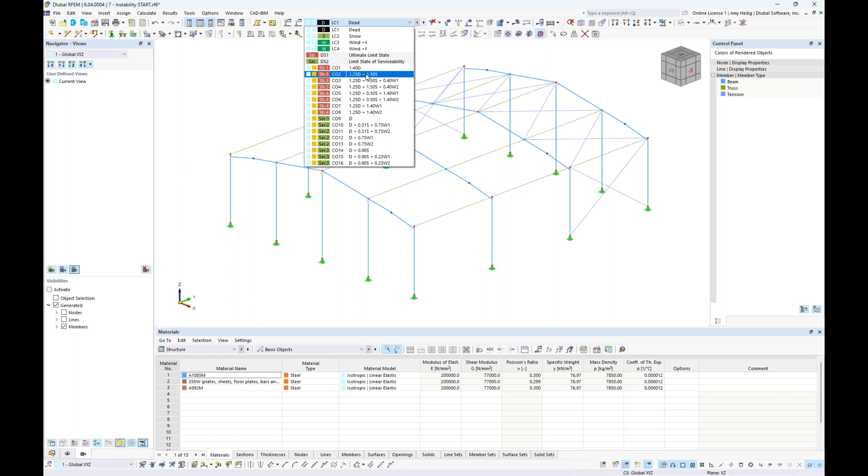I'll start off with this load combination here, dead load plus snow load. Keep in mind, this is always run by default according to a second order analysis. Again, my load cases solve fine, we're moving on to load combinations. So I'm going to carry out this calculation, and the program will attempt to run this.

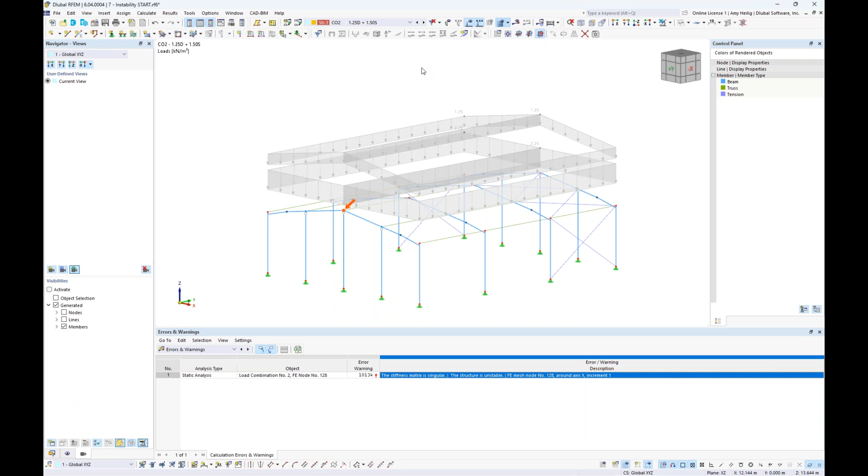What we should find here is our third instability. This time we can see the structure is unstable around the global x-axis. Now, when I turn off the display of the loads here, we've really ruled out any modeling issues, because those load cases under first order analysis solve perfectly fine. So we know the nodes are connected, everything is fine there.

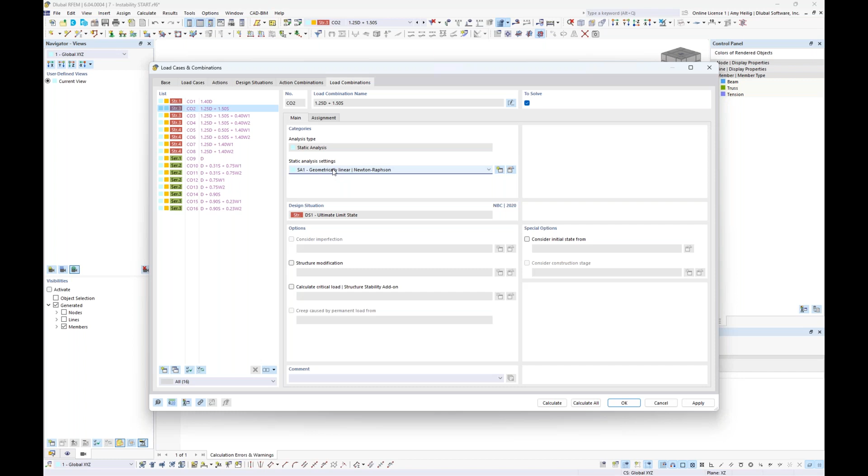What I would suggest doing for instabilities under load combinations, these are by default solved according to a second order analysis, so if you're getting an instability, I'd suggest changing this to a first order analysis. In addition, we can activate this structure stability add-on, but I'm going to go into my definition type and carry out the standard eigenvalue analysis with 4 eigenvalues to solve for. We would hope then that when we solve load combination number 2 here, the first order analysis will solve okay.

And actually what we see here immediately is that no errors are shown. The structure solves just fine under first order analysis. So what could possibly be the problem then with second order analysis?

Well, I toggle down to my stability analysis results, and we immediately see what the issue is. The four eigenvalues that we solve for have a critical load factor of 0.67, with the relevant buckling mode shape for these very slender columns shown here. Anything under a value of 1.0 is always a problem. This means the structure cannot take on 100% of the applied loads in load combination number 2 before it's going to fail, as we see here.

If we take a look at the other relevant mode shapes, it really has to do with these slender columns. So clearly we need to make a change to our model because it cannot take on the applied loads.

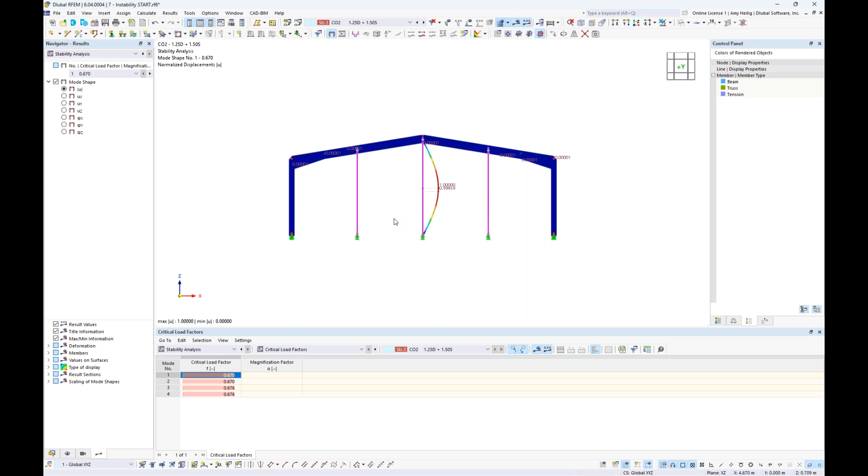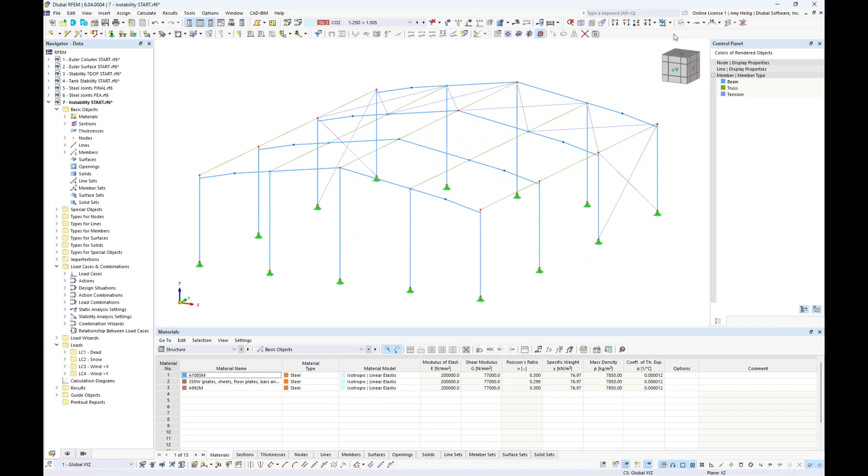So we're going to select here all of our vertical columns that are very, very slender. We'll go ahead and double click them, and under the section, we're going to modify this. Instead of an HSS 51 by 51, we'll change this to an HSS 127 by 127. So when we click OK, let's take a look at the model. Even in the rendered view, I think we can all agree this looks like a much more applicable section than that very slender HSS.

So I'm going to go back to load combination 2, and I'm going to change this to a second order analysis, which again is what we would hope to carry out considering P-delta effects. We can leave the structure stability add-on active here. And now, hopefully, with these more robust sections, we should see the full static analysis solve here for second order.

And sure enough, we see the calculation carry out just fine. We can turn this into wireframe view. So we see all of our static analysis results. And we also toggle down to the stability analysis.

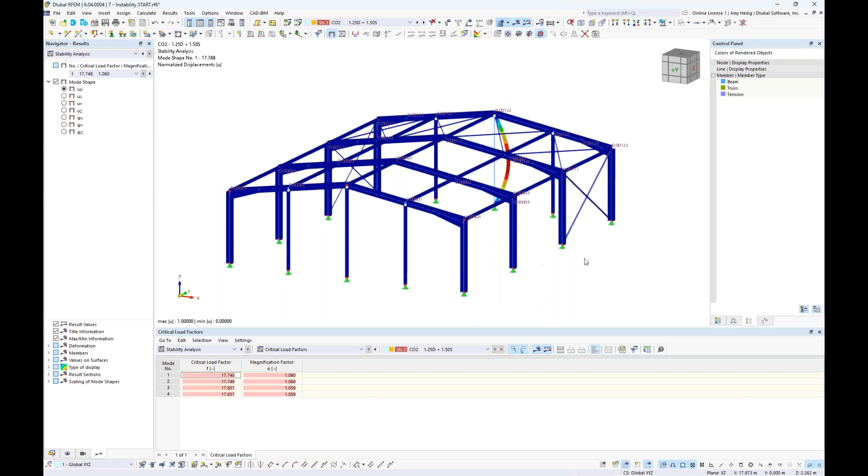Now looking at the first four mode shapes, we still have buckling here of these columns, but the critical load factor is now 17.748. So we could probably say that this failure of these columns is not a concern, because the structure can take on 17 times the applied loads from load combination number 2 before we would see it fail, as shown here within this first mode shape.

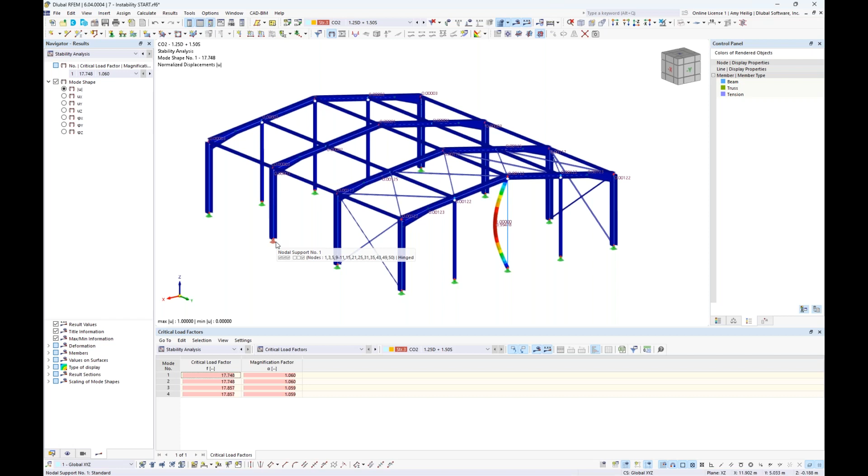So again, the structure stability add-on not only can carry out the buckling analysis of our structure, but also we can utilize it to help us with those modeling errors and instabilities.